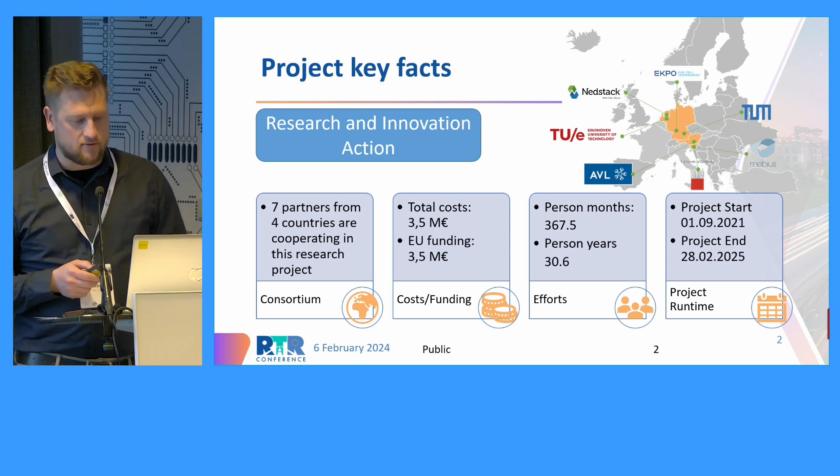About our core objectives: it's all about durability, it's all about costs, and also the implementation of the fuel cell technology in the heavy-duty sector. And therefore, some specific tasks need to be triggered.

We have to figure out how we can accelerate it, how we can perform accelerated stress tests to do a lifetime verification. We do specific improvements on the core components of the fuel cell, the so-called catalyst layer.

In parallel, we also try to improve degradation models, which is a key component, I would say. And resulting out of these points, we will try to optimize and validate the operating conditions of the fuel cell, and in the end, do a full fuel cell lifetime indication.

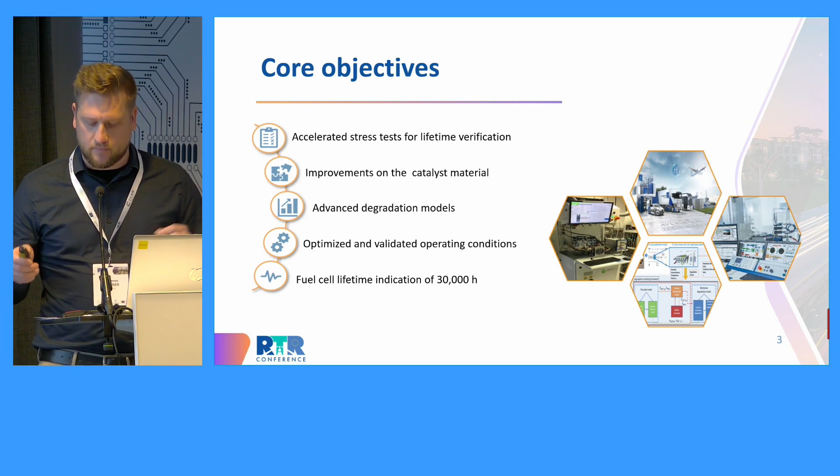So this is basically the story of our project. And now I really want to focus on the results that we have gained so far, because this is the focus of this conference, as I've heard.

It's about also the understanding of how can we endure and how can we make the fuel cell more durable. This is strongly related to the understanding of how a fuel cell ages, and at the end, we investigated strongly the effects of this degradation.

Because of that, we were lucky to have fleet data in our consortium that we could apply on specific accelerated stress tests, which were then created by the Technical University of Munich.

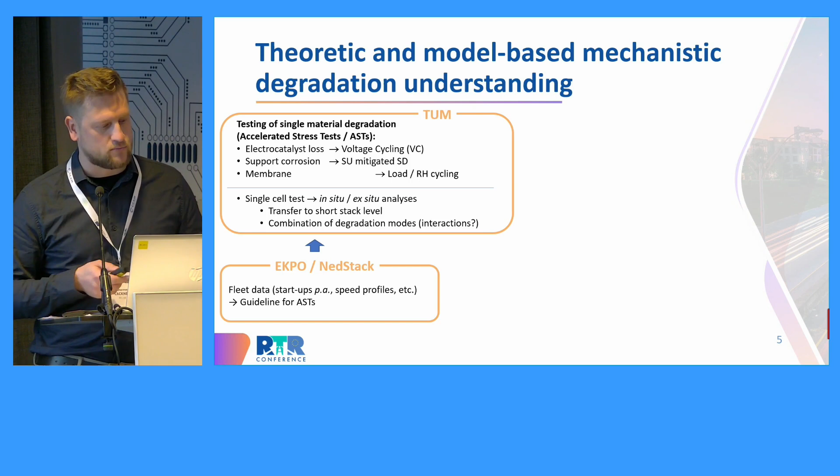We figured out that 3 specific accelerated stress tests are the most severe in aging the fuel cell. We dedicated these to the so-called voltage cycling, the startup and mitigated shutdown, and the load and humidity cycling on the fuel cell.

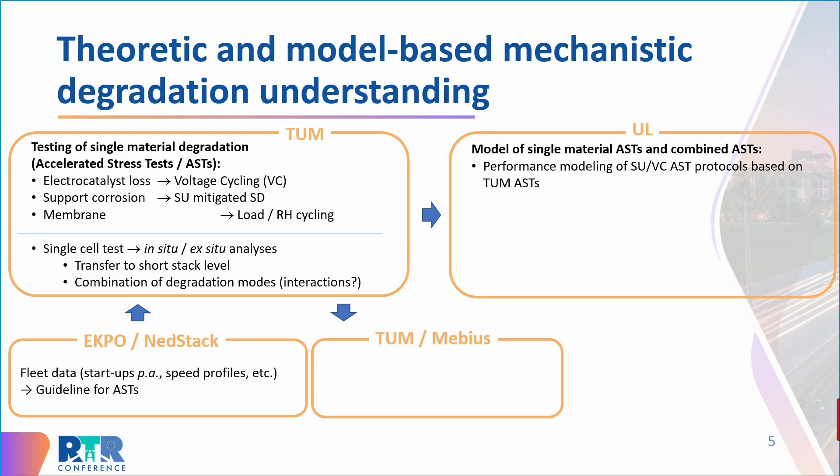With these test protocols performed by TU Munich, we then fed our performance models, which were then improved. In parallel, this was good input for the creation of our catalyst development.

With a feedback loop from our catalyst manufacturer, the extension of the model was also done in terms of degradation of bimetallic catalysts.

In our project, we are aiming to have a specific bimetallic alloy, a platinum copper alloy, which hopefully allows us to gain or create a cheaper catalyst material with high durability.

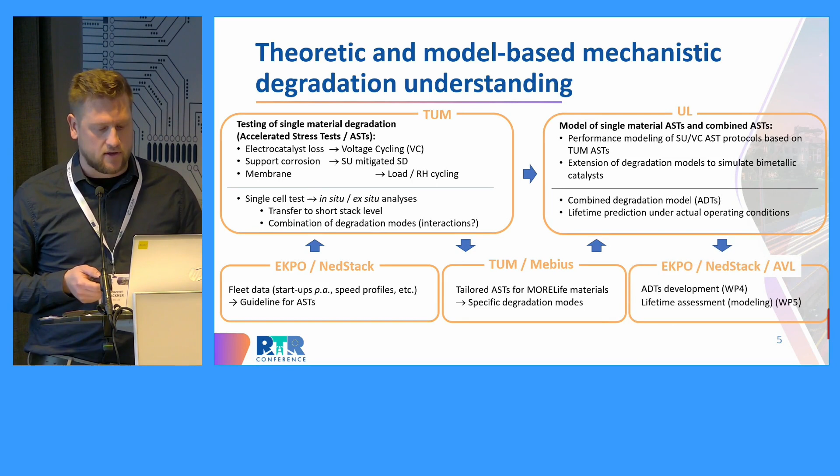So again, we have created these models and adapted them. At the end, but we are not that far yet, we want to perform durability tests and do a lifetime assessment on these models and also of the material.

So just an example of how these accelerated stress tests are being performed. It's not so easy to translate a specific speed or load profile into a specific stack load cycle. For that, we approached it by taking the existing VECTO tool using the speed profile of this tool.

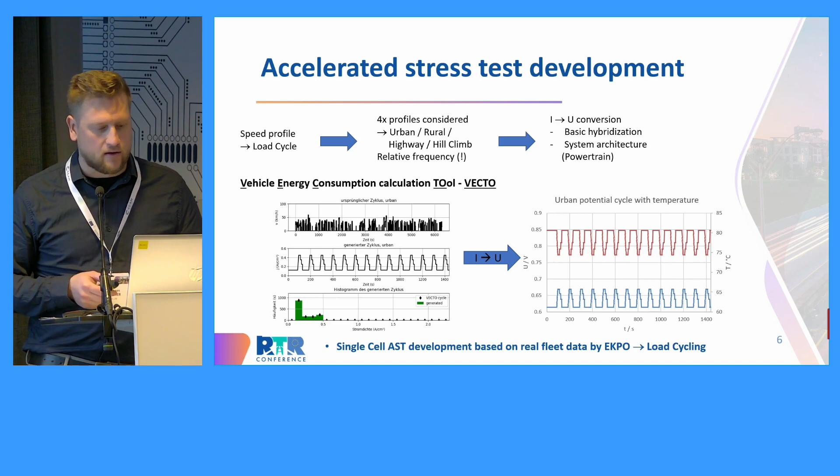Then we considered 4 specific profiles: urban, rural, highway, and a climb profile, and translated them, because we have a system that is current controlled, and we try to convert this into voltage control into the fuel cell.

And this is what we then created: we defined an AST matrix with an upper potential level of 0.85 volts and roughly 200 K cycles. So this is just an example of one of the accelerated stress tests we created, one of the 3.

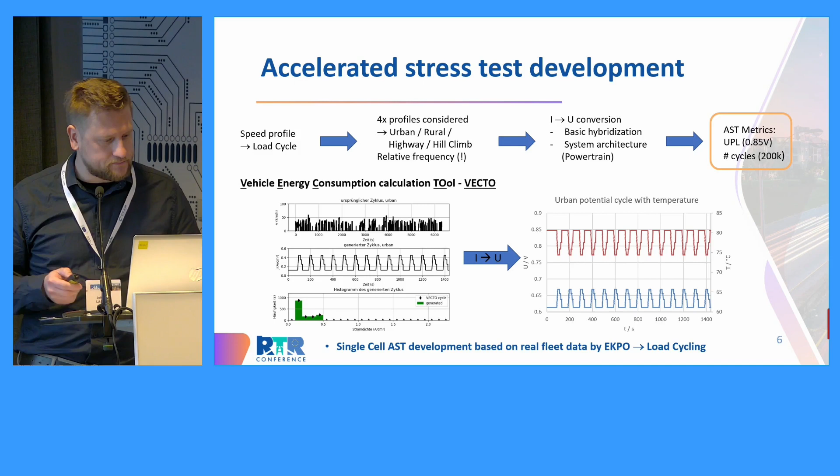Also mentioning then in parallel the model framework which has been performed. The idea of these models, or the need of them, is a deep understanding of the degradation, also having an extension of these models to our needs of degradation of a bimetallic catalyst.

So this was not existing yet. We do have some experience, or some models, for pure platinum catalysts, but in terms of bimetallic, we didn't have it anyway.

So the idea is really we had to apply, or adapt these models to specific dissolution processes which happen in these catalysts. I don't want to go into depth with that because it's really deep electrochemistry.

But at the end, the most significant issue we have with this bimetallic catalyst is that the copper is dissoluting over time and is somehow poisoning the fuel cell. This is what we want to investigate, and this is what we want to mitigate at the end.

And therefore we created these models which show the process of these dissolutions, and these models could have been parameterized and are now working accordingly.

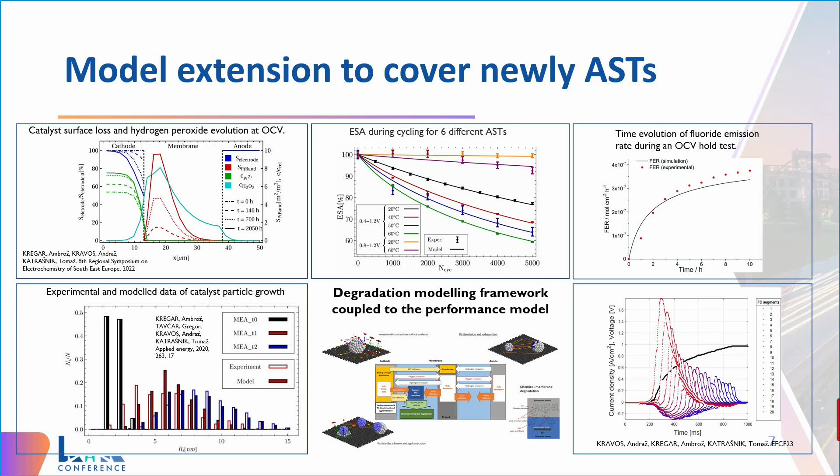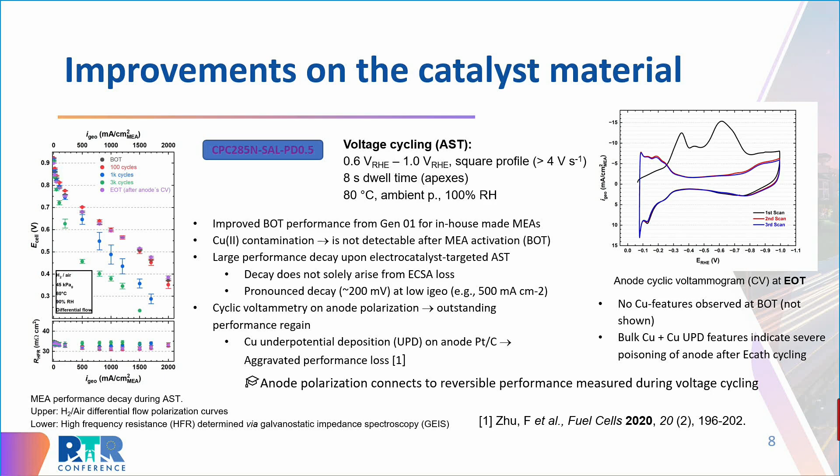We also have some ongoing collaborations with other research projects.

More specifically, MORELife is in discussion with the RWTH project, which is also a road transport heavy-duty application project. We try to provide some of the test protocols we created to the RWTH project, and once they perform these tests, hopefully we can get results in time, since MORELife is coming to an end, which will provide results we can use for adapting our models, for example.

This is a consortium of fuel cell and battery-related projects, where we search for synergies we can find within the projects, and we also try to have common dissemination activities. For example, we will have a joint booth at the TRA in Dublin.

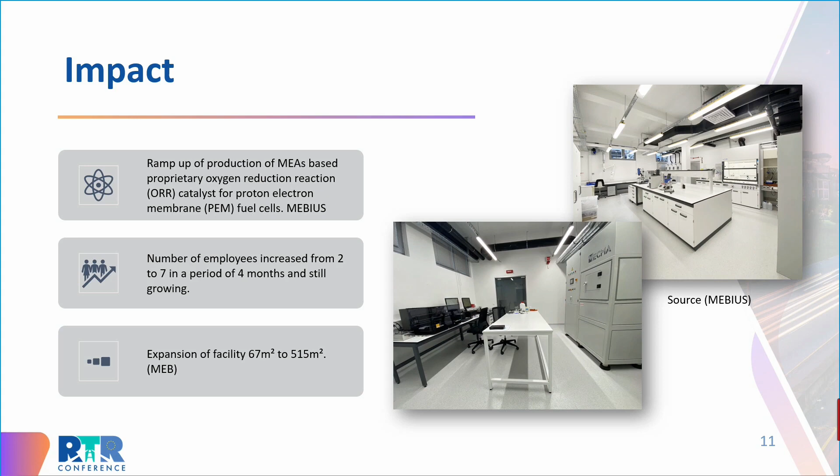So this is the midterm or actual impact, and now we are aiming at the impacts for 2023. We really want, as I said in the beginning, to bring fuel cell technology into the market, and this can only be done with severe cost reductions and a severe increase in the durability of the technology. For sure, we also have to do the industrialization of the product.

As I said, the targeted impact is to strengthen the European fuel cell industry, and we are also trying to increase collaboration between academia and industry. These are our settled goals, our impacts for 2023.

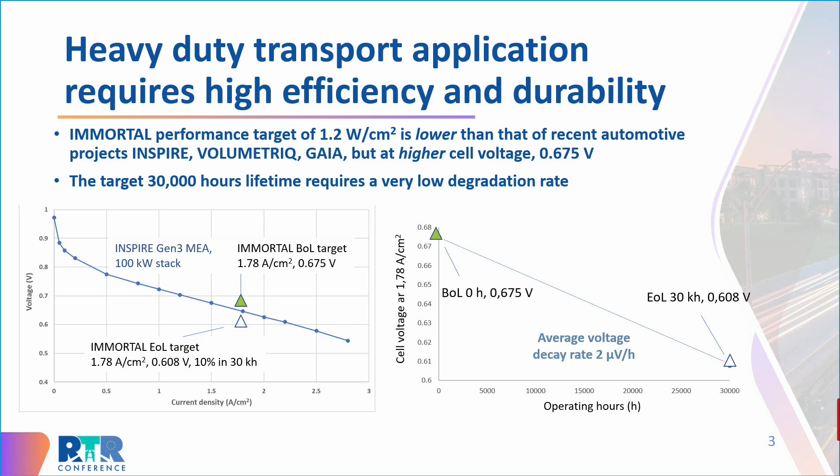So we're talking about heavy-duty transport application. Obviously the key requirements are high efficiency and durability, and so I've expressed those here. The target in terms of performance in the call for proposals was to reach 1.2 watts per square centimetre at 0.675 volts. The 1.2 watts per square centimetre is not in itself a massive issue - it's lower than we had worked on previously, or the targets in previous automotive light-duty vehicle projects, such as INSPIRE, VOLUMETRIQ or GAIA, where the performance target in terms of power density was 1.5 or even 1.8 watts per square centimetre. But the point is that it's at a higher voltage because we're looking for higher efficiency.

So this is one of the polarization curves that we obtained in the framework of the Inspire project. You can see that the IMMORTAL beginning-of-life target is just above that polarization curve there, at the current density of 1.78 amps per square centimetre. So that is to say that it was beyond the state of the art at the beginning of the project.

In terms of lifetime, the target in the call for proposals was actually 30,000 hours. That was actually beyond the SRIA target, which was developed subsequently, which was 20,000 hours for 2024. If we look at that beginning-of-life target on the right-hand side, and if we say that 10% degradation represents the lifetime, take 10% off of that voltage, then our end-of-life voltage is going to be 0.608 volts at that current density, which gives an average decay rate of only 2 microvolts per hour. So that's obviously a very low degradation rate.

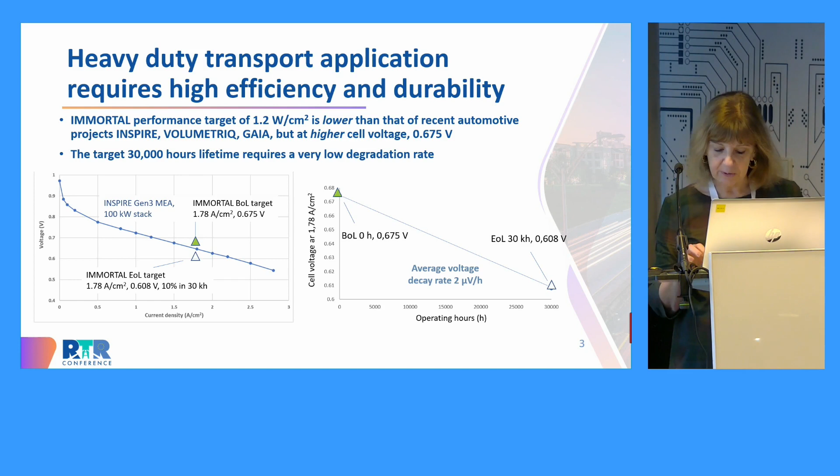Equally, there was no intention ever to actually test out to 30,000 hours of operation. So on the basis of what we could derive from the degradation profiles using AST and LPT protocols, then to develop algorithms for lifetime prediction to see to what extent we would actually achieve 30,000 hours of operation. And ultimately, of course, to achieve the targets in terms of performance and efficiency in particular, but also a calculation on the cost.

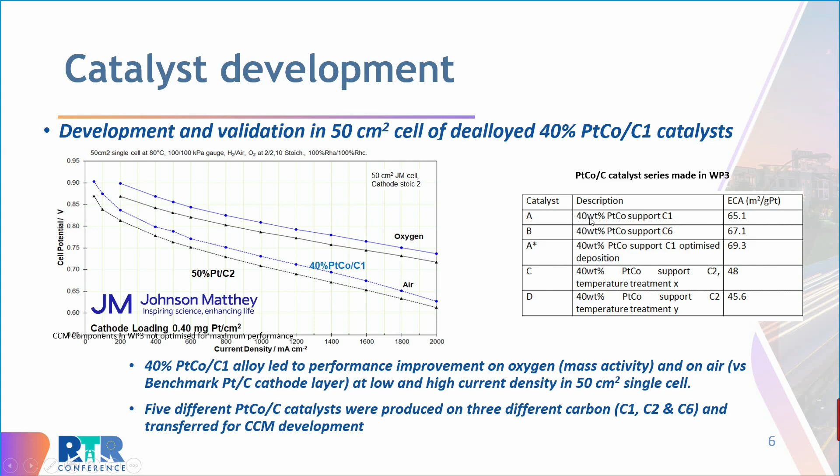So here's one slide on development at Johnson Matthey on de-alloyed platinum cobalt catalyst supported on carbons. I'm not going to go into any details of the preparation, but I just want to point out that Johnson Matthey developed a whole range of different carbons, of different catalysts, with the platinum cobalt actually supported on these different carbons, with some of the specifics given there.

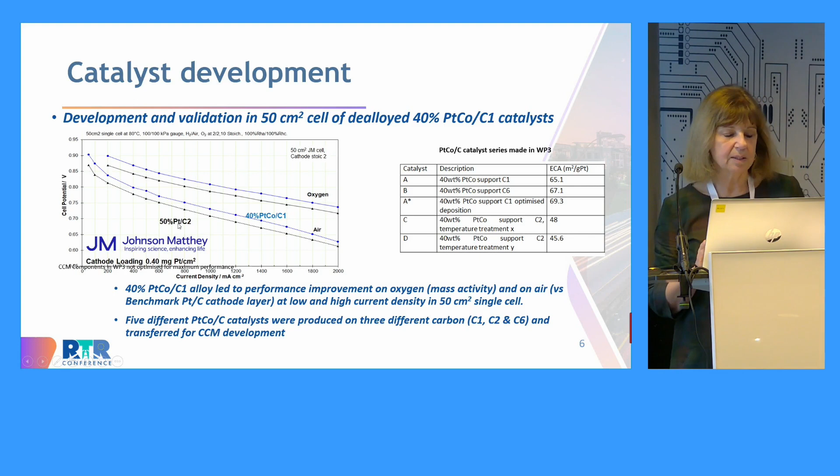In the testing carried out, this is on 50 square centimeter cells, the platinum cobalt, whether on air or oxygen, simply for calculation of the mass activity, but you can see they're more highly performing both at low and high current densities than the standard platinum on carbon material.

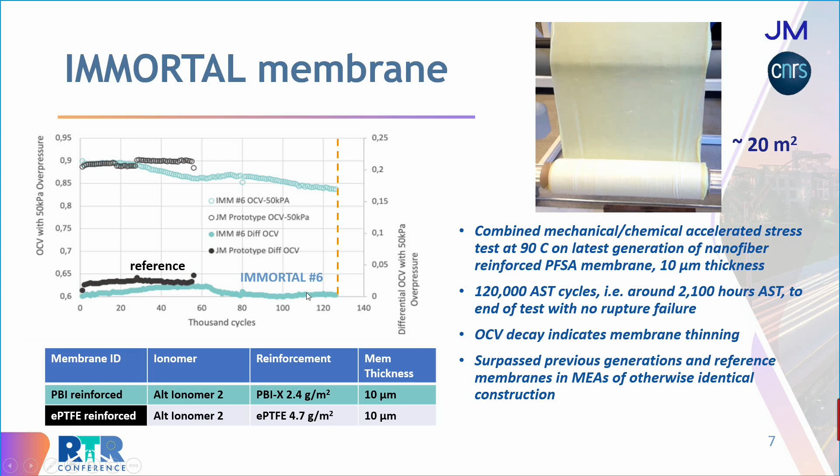It's a 10 micron membrane. What I'm showing here at the top is the OCV degradation, and at the bottom essentially the gas crossover, so it's the response to a small pressure differential at the anode.

So the accelerated stress test is the cell being held at 90 degrees C. There's a wet-dry cycling at open circuit voltage hold. So we're testing both for mechanical and chemical stability of that membrane as it's being held in the membrane electrode assembly. So this is the reference MEA with the absolutely same construction, but a different kind of reinforcement, standard PTFE reinforcement. This is the IMMORTAL membrane with a nanofiber type,

non-PFSA, non-fluorinated reinforcement. And in fact, we stopped the test here, or Johnson Matthey stopped the test here at 120,000 of these AST cycles, which actually corresponds to, in real life, more than 2,000 hours of actual AST testing with no rupture failure. We can see that there's a bit of a thinning here. You can see that through the drop in the OCV, but there's no catastrophic failure. The membrane is holding out.

It's also interesting to see that for membranes of exactly the same thickness, we're also using less reinforcement material with the nanofiber reinforcement than in the case of the PTFE reinforcement.

So how does that all come together then in terms of the CCM and the performance in the fuel cell? So here we have results from the testing at Johnson Matthey and at Bosch. We have three essentially generations of CCM or membrane electrode assembly. This was our baseline, generation 1. This was generation 2, in terms of the power density at that 1.77 amps per square centimeter spot.

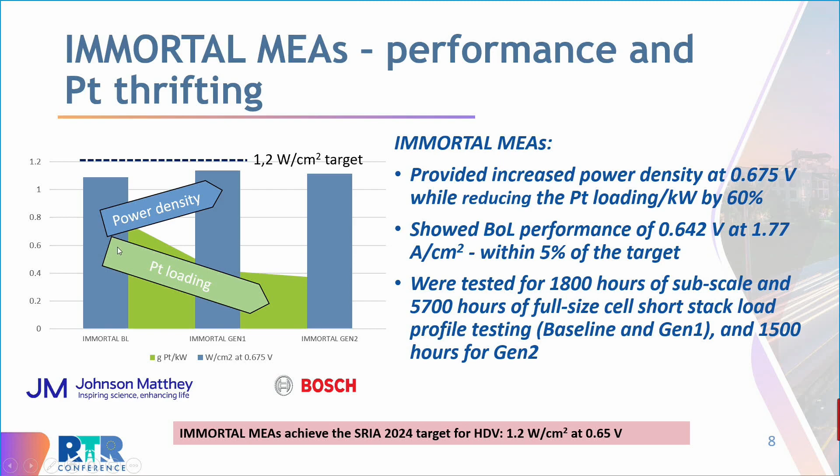So you can see that we've been gradually improving in terms of the performance. But notably as well, Johnson Matthey has been using far less platinum. There's been a lot of platinum thrifting, so improvement with regard to the amount of platinum and in fact generally noble metals incorporated into those CCMs, going down from 0.84 grams of platinum per kilowatt down to 0.36. So that's a significant improvement. That's what's written up there.

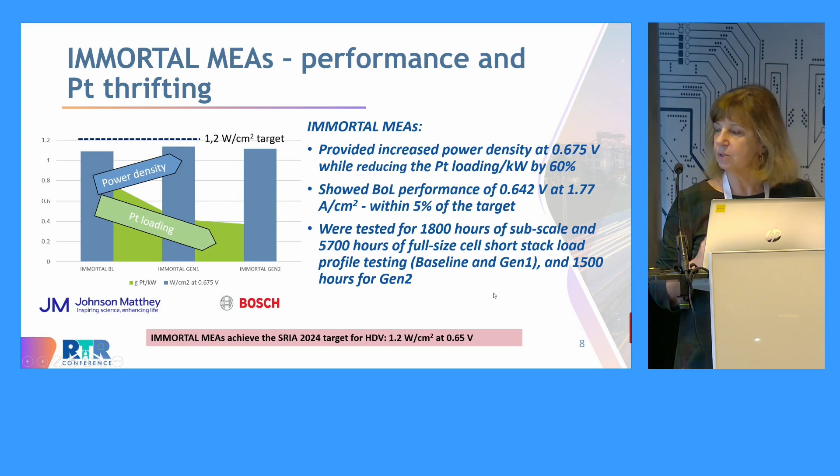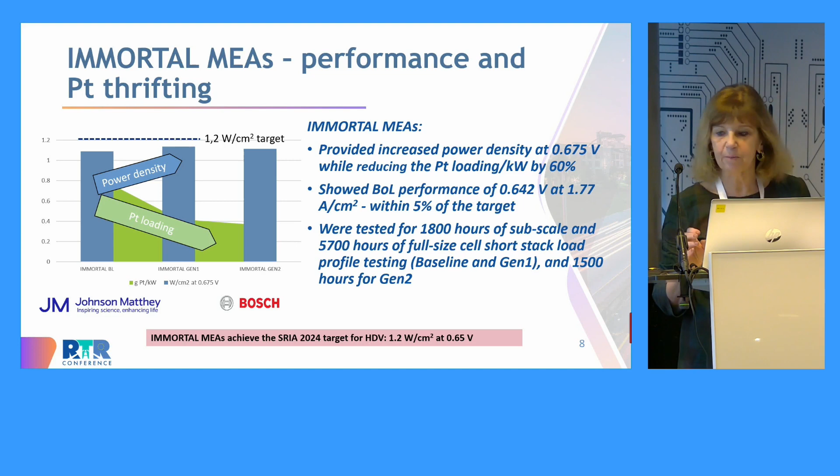These CCMs were tested in both short subscale, so small single cells, 50 square centimeters, but also full size short stacks for a total of, in fact, over 7,000 hours, once again, without any catastrophic failure. So let me show you that. But first, let me tell you all about the load profile test development.

Important work was done on actually what is the load profile that we use to test these CCMs that we've developed. So we're talking about truck activity, truck usage, obviously many different kinds of profiles that could be used for that. Our original intention was actually to use real-life data from fuel cell trucks.

That actually wasn't possible during the course of the project. But it was possible at FPT to have real-life mission profiles from different kinds of trucks.

That work was to simulate different drive cycles. In fact, more than 450 drive cycles were actually simulated. And then the extraction of the stack load profiles and the selection of the load profiles for testing, a lot of work between FPT and Bosch.

Those load profiles were then processed to enable their usage in terms of a modal load profile test that we could use for testing our stack. In parallel, there's the work done in collaboration between Bosch and IMTEK on accelerated stress testing on single cells, load profile testing on single cells, on short stacks as well for AST and LPT. So that gives us the acceleration factor between the AST and the LPT, but also the scaling between what happens in a single cell and what happens in a stack.

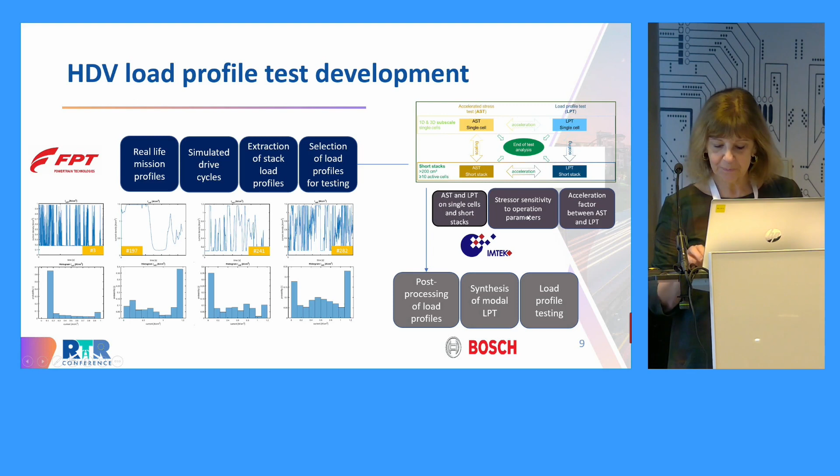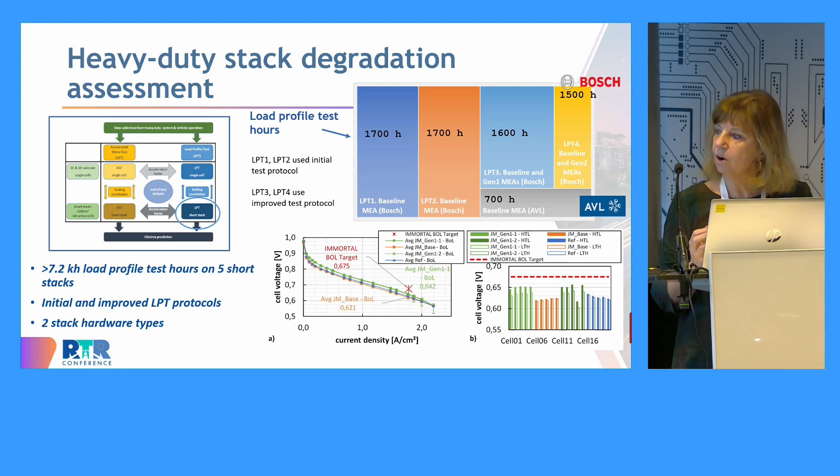With application of all of that, and I've already told you that in total there were more than 7,000 hours of load profile testing carried out on different generations of short stacks. We used an initial load profile test on our baseline MEAs and also on our Gen 1 MEAs. We then used that improved load profile test to test subsequent generations of MEAs. The message here is that in total, more than 7,000 hours of testing, 2 different sets of stack hardware - Bosch stack hardware, but also AVL stack hardware - and these initial and improved LPT protocols.

This shows the improvements during the course of the lifetime at that 1.77 amps per square centimeter point, moving up from the baseline up to generation 1, which is the green line there, and the ultimate target point, which is that one there.

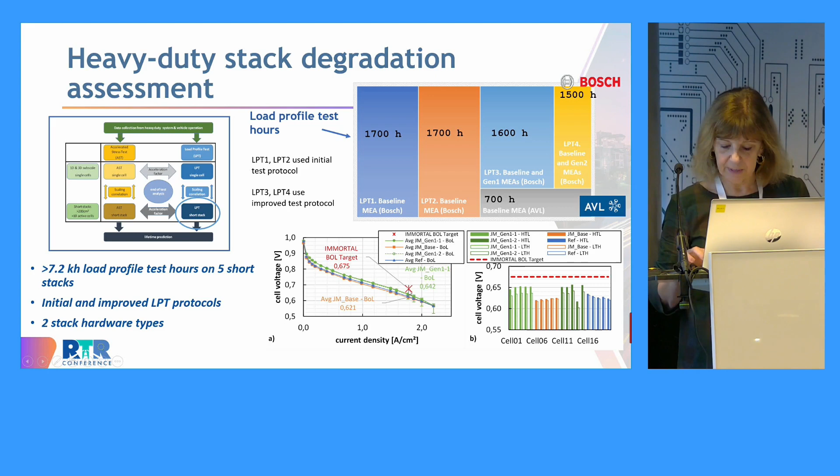So all of this AST and LPT testing generates a lot of data. What we discovered was that the degradation is essentially due to platinum dissolution, loss of the electrochemical surface area of the catalyst. That was determined experimentally.

That was also modeled. Using this information and following the development of lifetime prediction algorithms, the work done at Bosch was able to model the baseline voltage loss, having used all of the information on the ECSA loss determined during the AST experiments. I mentioned earlier that our criterion is to maintain 90% of the voltage at 1.77 amps per square centimeter, and extending that lifetime prediction out to 30,000 hours does show that in principle that would be obtained.

That's a very interesting result obtained with the baseline MEA - that they would actually achieve the full 30,000 hours were we to test out for that period of time.

So this summarizes what we've done. I've talked about the new membrane architecture with this novel reinforcement, thin membranes, 10 micron membranes that allow very high durability, no rupture failure, high mass activity alloy catalysts developed on novel carbons that certainly show an increase in the beginning of life performance on the MEAs.

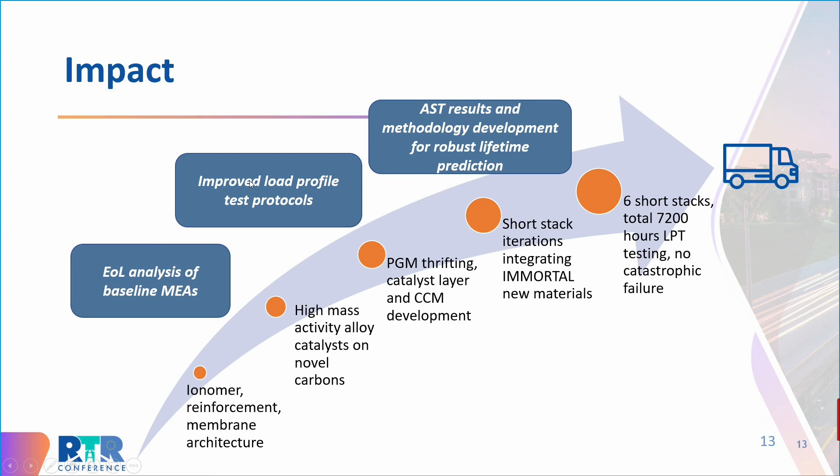And then obviously extremely important was all of the end-of-life testing on the baseline MEAs, to show what was the problem with regard to degradation, to feed that into the algorithms, but also to improve materials. Important work done on developing these load profile test protocols, because we need to know what are the relevant conditions for testing our single cells and our stacks, and then bringing all of these results together for the lifetime prediction.

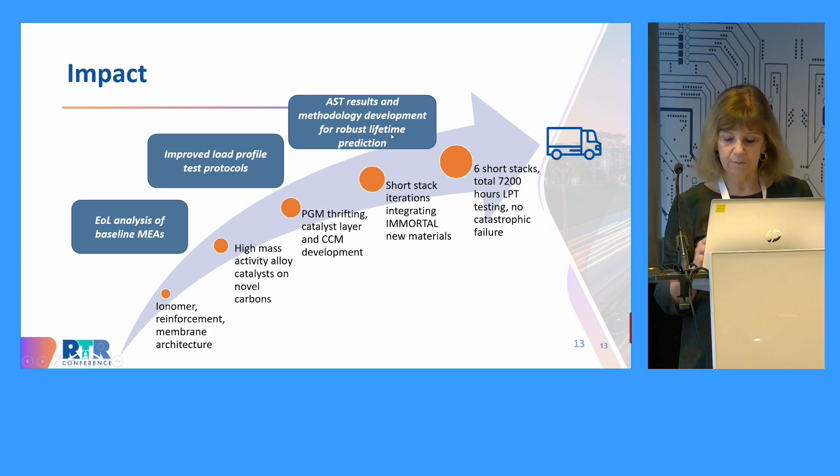What we showed is that with our baseline MEA, in principle we can reach the lifetime target of 30,000 hours.

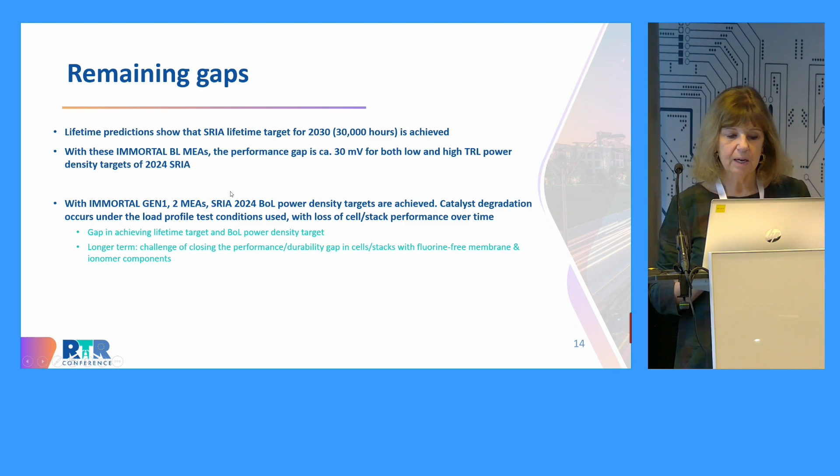Those that are not the most highly performing fall short by about 30 millivolts at the 1.78 watts per square centimeter point. They fall short a little bit, but they would achieve the lifetime.

On the other hand, we can achieve the power density targets with alloy catalysts, but then the durability is not achieved. So there's a gap in actually achieving both the beginning of life power density and the durability at the same time. But I think having, in principle, achieved the lifetime with an immortal MEA is a very significant result. And longer term there's clearly going to be a challenge to close the durability and performance gap if we're moving on to fluorine-free MEAs.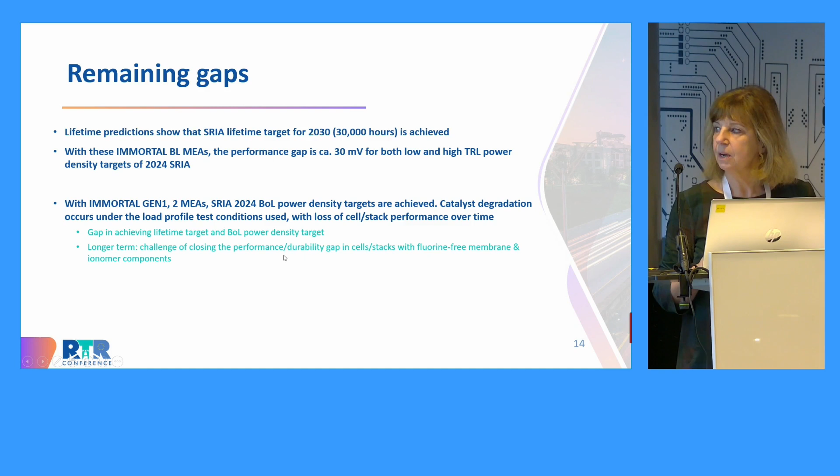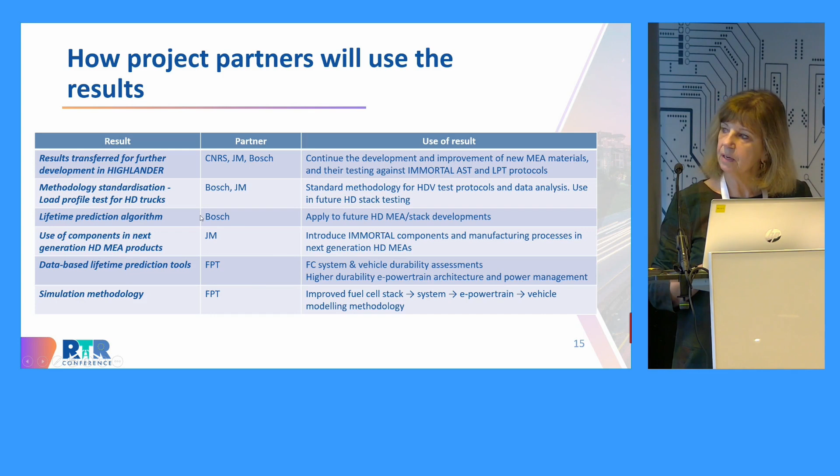So the project partners will use the results in various ways. CNRS, JM and Bosch are continuing to work together on materials development in the framework of the Highlander project. JM is going to move forward with the use of these components in their new MEA products. There's been a lot of methodology development and simulation methodology development, so methodology standardization for LPT development at Bosch, and simulation methodology and lifetime prediction tools at FPT.

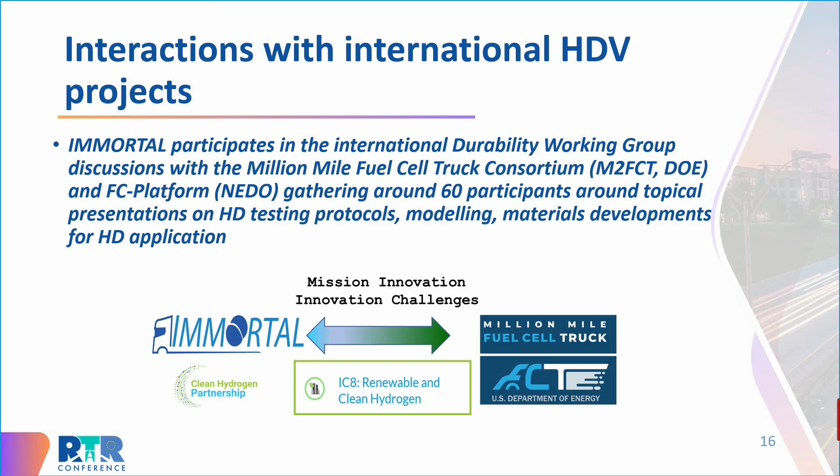So lots of application areas, both for the research partners and for the industrial partners. Finally, just to mention that we responded at the beginning to an invitation from Mission Innovation to interact with a project in the United States, a million-mile fuel cell truck project. We have regular two-monthly meetings with that grouping, which generally gathers around 60 different participants from the US, Japan, and Europe, all working on fuel cell truck heavy-duty applications. And so, thank you.

Thank you very much, Deborah. Very interesting and encouraging results. So I would like now to move on with the third speaker.

We are changing a little bit the topic, the subject, and Federico Zenith, who is a senior researcher scientist at SINTEF. He has more than 20 years of experience in the field, and his night job is to be the coordinator of the joint undertaking projects, one of them being StasHH, and we're looking forward to hearing about it. Please, Federico. Thank you very much, Pietro, for the introduction.

Yes, we started a project MORELife and then IMMORTAL, and we discussed with my colleagues that maybe a project should have a name like coffin or something. But I'm going to be talking about boxes in a few slides. It's actually about standards. We are not really that low TRL in this project.

For the overall presentation, it's a pretty big consortium we have in this project. Budget is pretty respectable, over 14 million euros. At the center we have several research institutions: my own SINTEF in Norway, FEV in Germany, TNO in the Netherlands, CEA in France, and Waterstofnet, the Hydrogen Association of Benelux. Then we have OEMs representing buses, construction equipment, trucks, ships, inland ships, ocean-going ships, automotive powertrains, and trains. So we've got pretty much everything moving on the surface.

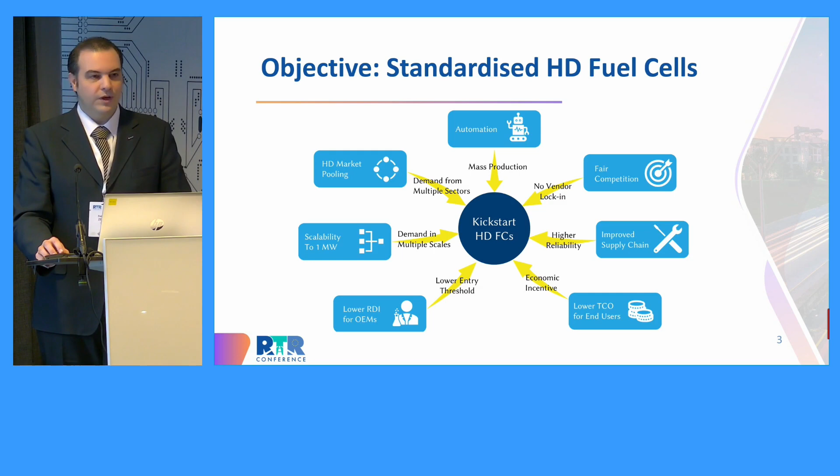So we have the first - size format standard is the most critical for OEMs. This is really important. If the next fuel cell does not fit the previous hole you had in the previous chassis, then you have to rebuild the chassis, and you start going down a rabbit hole of recertification, homologation, a process that can take years. So you want things to fit where they're supposed to. We ended up with these 3 base cuboid shapes: A, B, and C.

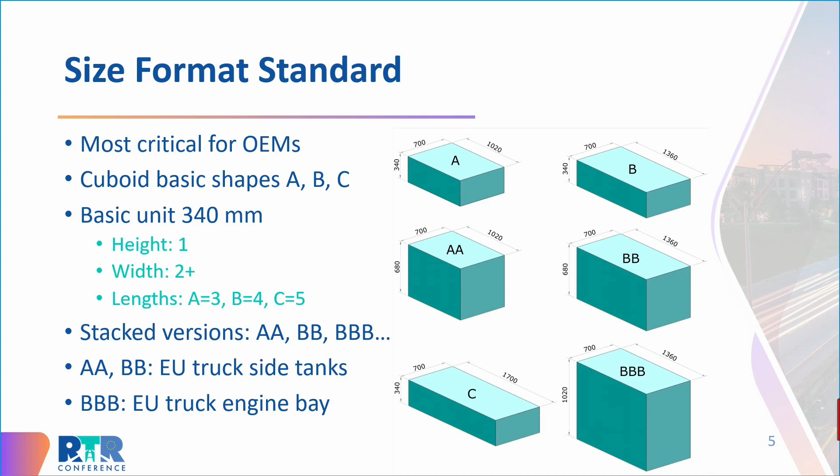We fought over every millimeter here. We start with a basic unit of 340 millimeters, which represents the height of this cuboid. Then the width is a little more than 2 - that's because somebody really wanted the last 2 centimeters. So we thought about this much - that's how hard it was. So it's 700 millimeters wide. And then the lengths are 3, 4, and 5 times the basic unit, and that defines A, B, and C.

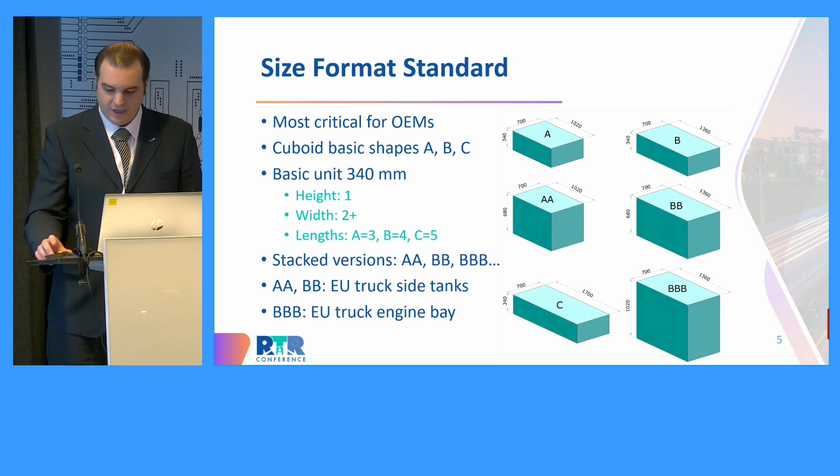Of course, there is no D, because that would simply be 2 A's in a row. Also, there's a standard by which if you double the letter, it means you're stacking upwards. So there's double A, double B, triple B, which are popular sizes for now. AB, AA, and BB are popular because they fit exactly in the place of fuel tanks in European trucks, and the triple B in the engine bay of European trucks. European trucks are very important because they're a very large market and very compact, especially compared to American trucks. That's why a lot of the standard comes from there.

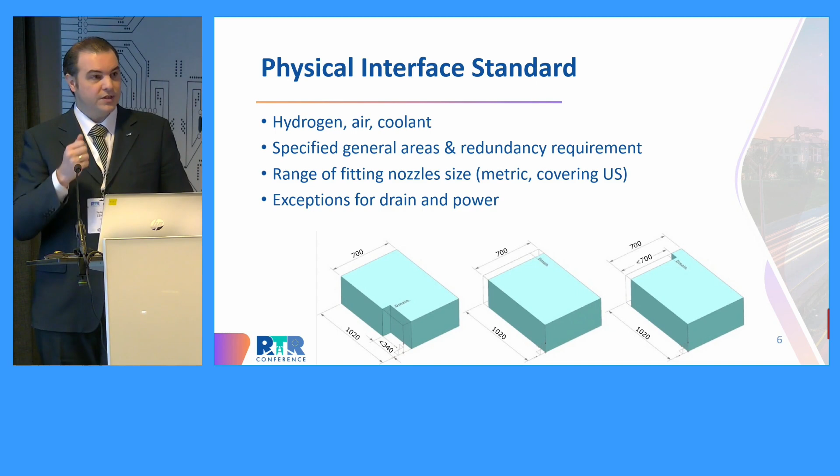Then, the physical interface. You also want to standardize where hydrogen is coming in, where air is coming in, where the coolant is coming in and out. In general, neither OEMs nor fuel cell manufacturers were interested in having a specific point with a specific connector - they were much more concerned with having a general area. It's pretty easy to move a pipe a few centimeters; what's difficult is if the pipe has to go all the way around the box, that would be a problem. There are some exceptions - the most important exception is power. It doesn't matter, you can bend a power cable around, but what's really important is where the hydrogen is coming in and out, and air and coolant.

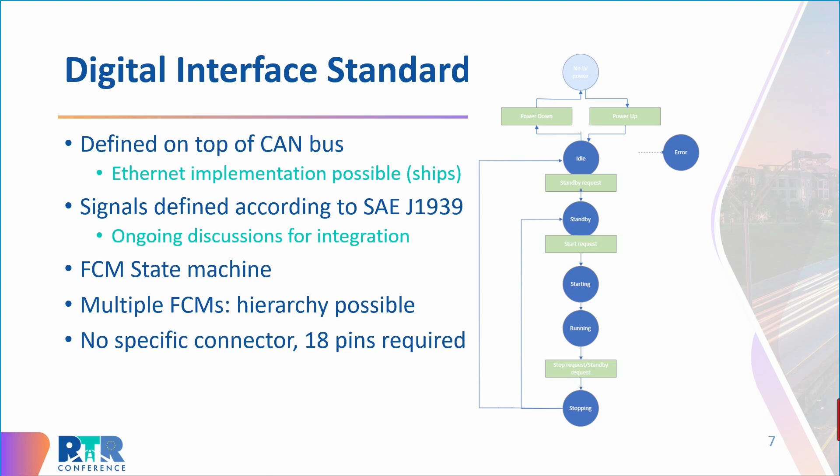Then, the third part of 3: digital interface. This is defined on top of CAN bus, but it's also implementable over Ethernet, and it was actually the maritime OEMs who were more interested in Ethernet - automotive were happy with CAN. Signals are defined according to the existing standard, SAE J1939.

We actually contacted SAE, and we're in dialogue with them to include our modifications to the standard - more than modifications, additions. The state machine is not too complicated, as represented there, and there's also a possibility of having a hierarchy of fuel cell modules. That's more important especially for maritime and trains, large applications. You can have all of them managed by a single controller, or you can have one of them acting as a leader with followers.

Again, we don't have a specific connector, just like for the physical interfaces. It needs to have 18 pins, but that's all the requirements. Pretty easy in a workshop to change whatever connector you have.

And then, well, of course, a lot of EU project defined standards. The problem was that after defining a standard, that was just a bunch of papers. So they required us this, and that's why we have a bigger budget. They required us to start building these prototypes to prove that we actually can do it. We're going to build 8.

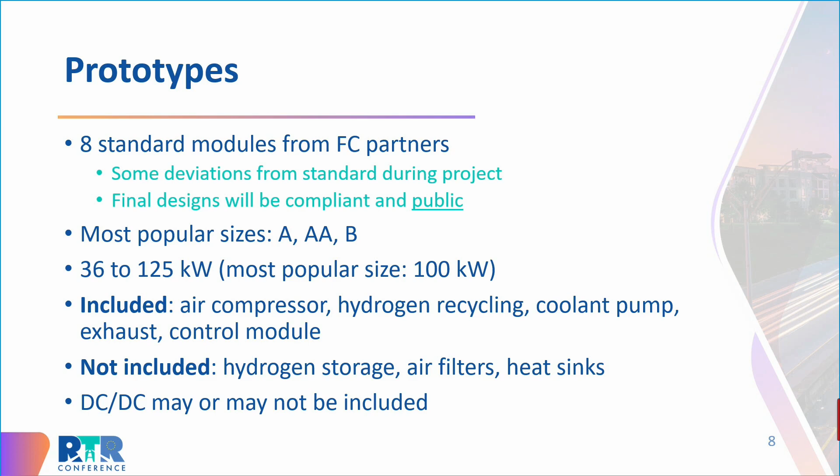There have been some deviations from the standard, mostly because the standard during the project has been a moving target, and so we have had some tolerance, but all fuel cell manufacturers are going to provide final designs, and they will be public, and you will be able in 1 year from now to go up to them and say, I want this one for my project.

Most popular sizes, we have seen AA and B. We haven't seen a BBB yet, and we haven't seen a C, even though the C size was supposed to be popular with buses to be installed on roofs, but apparently B is just as good.

The most popular power level is about 100 kilowatts, so in a higher range. Some are down to 36, some up to 125.

These modules all include the air compressor, hydrogen recycling, all the coolant pumps, control module and exhaust. They don't include, of course, the hydrogen storage, that's somewhere else, and the air filters and the heat sinks. And the DC-DC converter may or may not be inside.

We had a lot of discussion whether the DC-DC had to be included or not. We concluded that it's better that it's not fixed in the standard. There are some cases where it's useful to have it when you have only one unit. If you're maritime especially, you don't want to have the DC inside because you're going to have a separate unit for that.

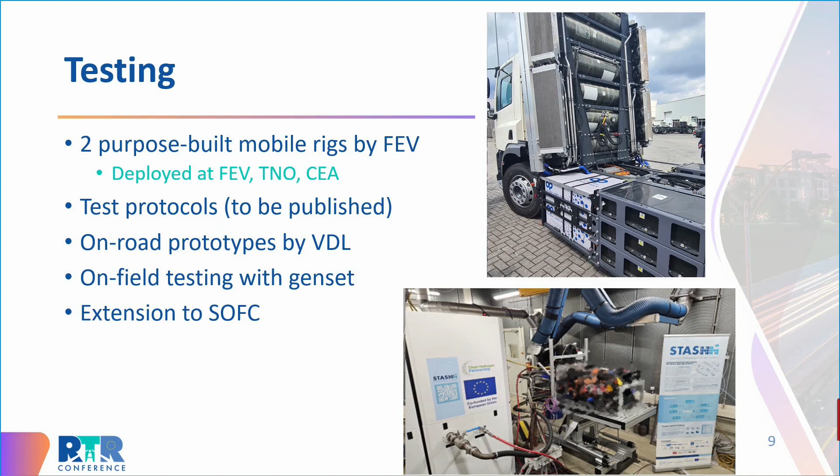Testing, yes, we have built this, and that truck runs in the Netherlands. This truck was also at the Hydrogen Week in Brussels last year. It's a truck built by VDL with 2 separate A-sized units, built by Plastic Omnium. You can see the logo.

And then we have 2 testing rigs in the lower picture. Fortunately for intellectual property reasons, you cannot see the actual unit there, but these have now been deployed at CEA. We are going to start, I think next week, a new round of testings.

Test protocols will be published. They're still waiting to clear that.

And there will also be some on-field tests with a genset that VDL has decided to build. And also VDL has decided to extend this to SOFCs. We assume PEM throughout, but actually the same technology, the standard, can be applied to SOFCs.

So, impacts. Well, of course, in 1 year from now, you'll be able to ask the fuel cell manufacturer to provide you these modules with this standard. We'll also submit the standard to various bodies. We're already in dialogue with SAE, and then we'll follow up with ISO. We'll see then. And we have a lot of FCM suppliers, of course.

We have a representative section of OEMs, and so we have a significant starting market, and hopefully this market will expand. This will make it easier for OEMs to start developing their hydrogen vehicles, and lower barriers for competition already in the short term.

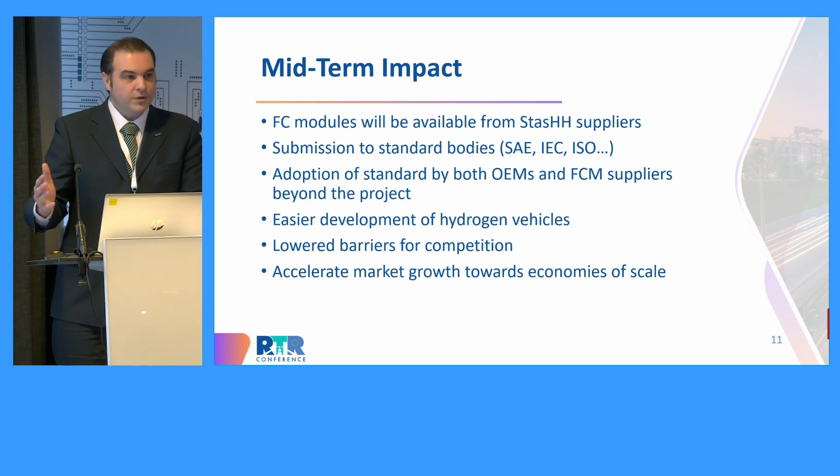And ideally, these will give impetus to economies of scale, which means that in the longer term impact, well, we all know heavy duty is more difficult to electrify than light duty with batteries. And hydrogen can solve this, but hydrogen also needs scale.

Batteries are piggybacking on the greatest infrastructure there ever was, the electric grid. Hydrogen does not have that. So we need scale in order to build this infrastructure.

StasHH will achieve the melting pot of all these markets, and this will show then that zero emission heavy duty is feasible. That's not a pipe dream. And this will hopefully encourage politicians to declare a year for zero emission heavy duty, just like they're all discussing zero emission cars cut off dates.

Norway is supposed to be next year, actually. We'll see how that's going to work out.

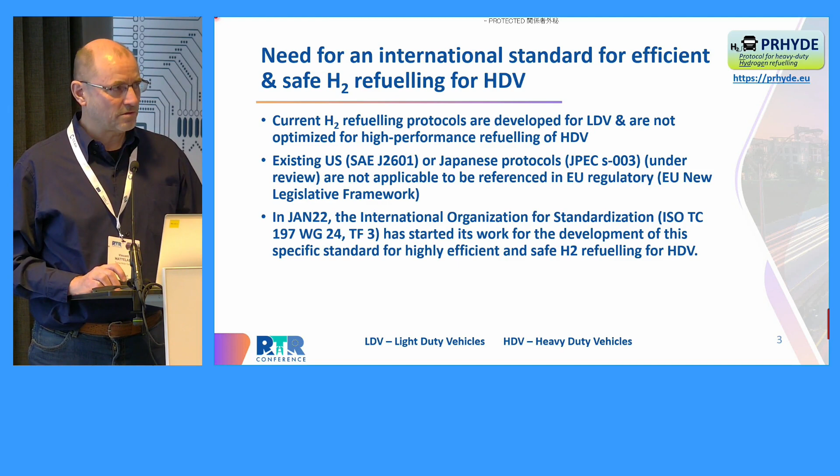We know there was already a protocol available for light-duty vehicles, and most of us are very happy with it. It's actually two protocols - a table-based version and an MC formula version for light-duty vehicles, used worldwide. However, it was a protocol from SAE, J2601, and it's not really an ISO international protocol or EN protocol, so it's difficult to use SAE within EU regulatory frameworks. We needed a more general protocol at ISO level, and also a protocol for higher flows - obviously fueling heavy-duty vehicles with the light-duty vehicle protocol would be way too slow.

So the overall objective was to support this standardization. The PRHYDE protocol, the result from the PRHYDE project which is already finished, is not a copy-paste protocol that you can immediately program into your dispenser and go ahead with it. It's more laying the foundation stones for developing protocols, because protocol development takes much longer and much more testing than just two years. This was done for heavy-duty vehicle high flows up to 300 grams per second, which is very high, for 350, 500, and 700 bar conditions.

So there were a lot of experts involved from Air Liquide and other companies who are very specialized in this and were able to test a lot of these fueling situations. So let's have a look at the results.

As I mentioned, the light-duty vehicle protocol already existed, but that was for 2 to 10 kilograms. There was an extra chapter in that protocol where you could go above 10 kilograms. It was called category D, but honestly this was suitable -- it says here 30 kilograms, I would rather say 20 to 25 kilograms within a decent time. You could go higher, in theory unlimited, but then the fueling time would take so long it would never be accepted by logistic partners.

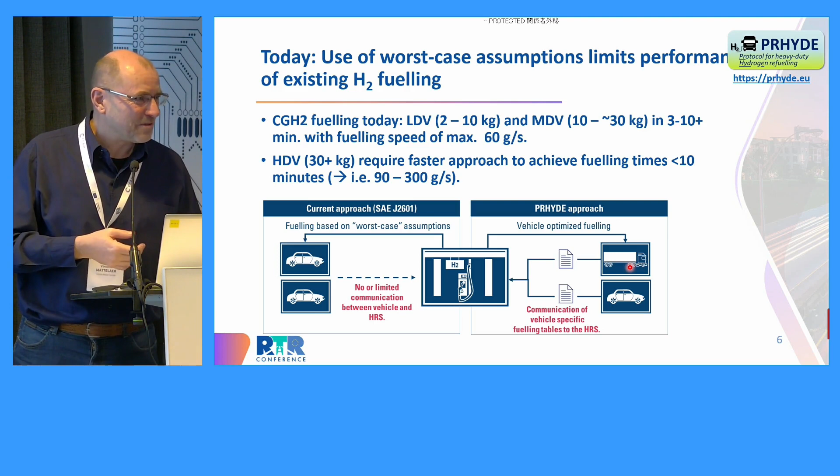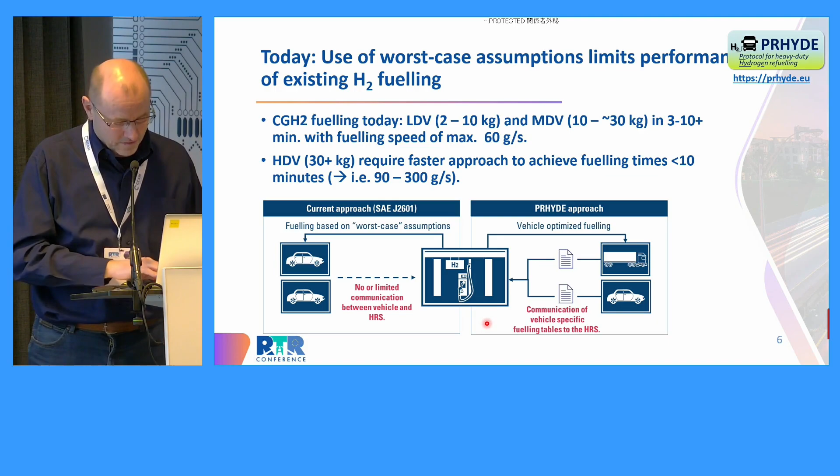So the PRHYDE approach is a bit different. In the PRHYDE approach, there will be a difference between one truck and another truck, for example, even though it might have exactly the same volume, same capacity in the tanks -- maybe truck A has a much lower pressure difference than truck B, and then truck A will be able to fuel faster, which was not possible with the current SAE protocol. So in this case, it's the trucks that send the information to the dispenser about how they are going to be fueled. I will explain later how this is done.

So the PRHYDE protocol concepts offer performance improvements, and we did several testing, and it succeeded. The big advantage is also that the OEMs can choose, they can become competitive, and they can say, okay, my truck will fuel much faster than my competitors.

National Laboratory in Colorado, NREL, has an H2FillS simulation software. We did simulations, checked the simulations with real-life measurements, and the simulations and also testing have proven that it is possible to do within 10 minutes. The most recent one that I've seen was about 89 kilograms in about 9 minutes. Now I have to admit, in that case there was no nozzle receptacle connection -- it was a direct connection, so that makes it a little bit different. But still, the results are quite good.

And it's based on the advanced MC formula, which was already existing for light-duty vehicles, but it's an advanced version.

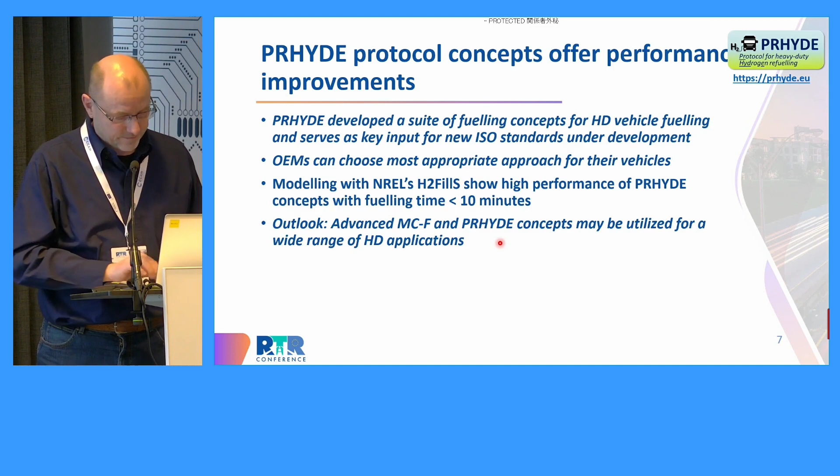So how does it work? First of all, the vehicle OEM needs to define a set of what we call T-final tables. Those are tables depending on the ambient temperature and the dispensing temperature. You check what, at these conditions, should be normally the fueling time for this specific model. A special simulation software needs to be developed in order to enter all the data, and then it can develop these T-final tables. You can have as many T-final tables as you want in your vehicle ECU, and they are stored in the vehicle itself.

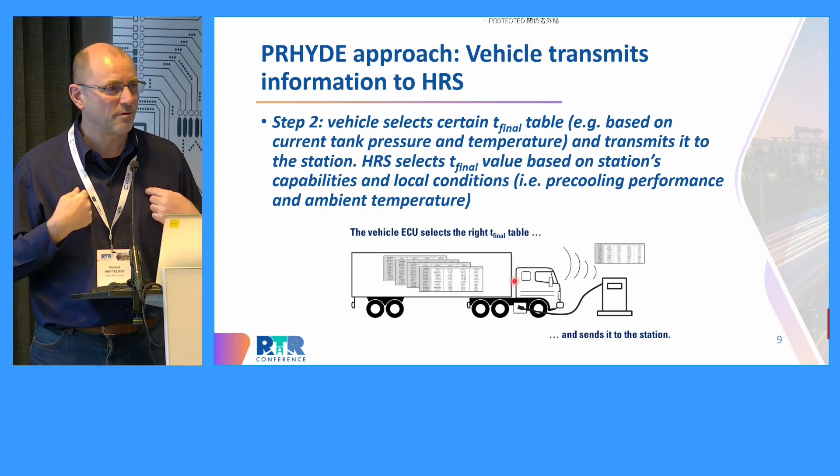When the vehicle arrives at the station, it will have a certain temperature, tank temperature, and a certain initial pressure, and it will choose the corresponding T-final table, and send that T-final table to the dispenser, saying, I want to be fueled in this way, this is the way I want to be fueled for my truck. This is very different from current protocols, where everything is already pre-programmed into the dispenser, and it will fuel any vehicle in the same method.

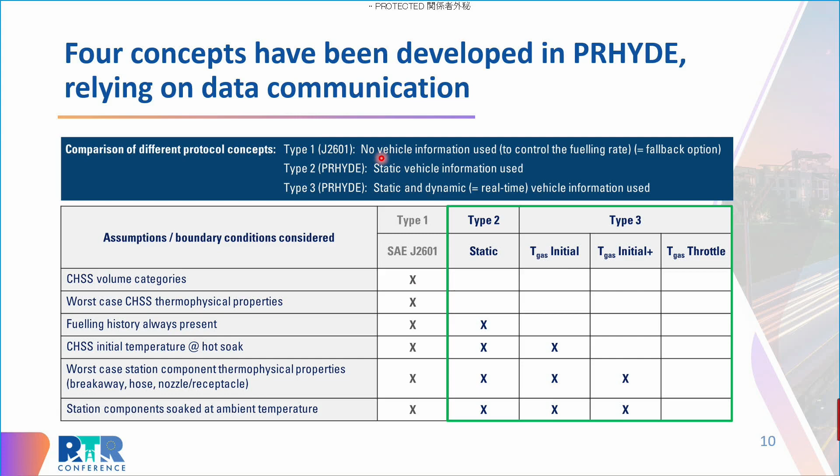So we differentiated different types of protocol. Type 1 protocol was the one which used no vehicle information, so you can go into non-communication mode even if you want to. Type 1 versions, even based on the PRHYDE protocol, already exist, because they are now integrated into the new standard SAE J2601-5, which is specifically for heavy-duty vehicles. So that's the first type.

The second type is what we call a static type, where a lot of information is sent to the dispenser, but it will not really use the dynamic approach of continuously checking the pressures and temperatures of the vehicle. But it will, for example, check if fueling history was present. So, for example, if a truck has fueled first at 350 bar because the price is cheaper, and then afterwards takes the next dispenser at 700 bar to top off with a little bit more expensive, that will be taken into consideration.

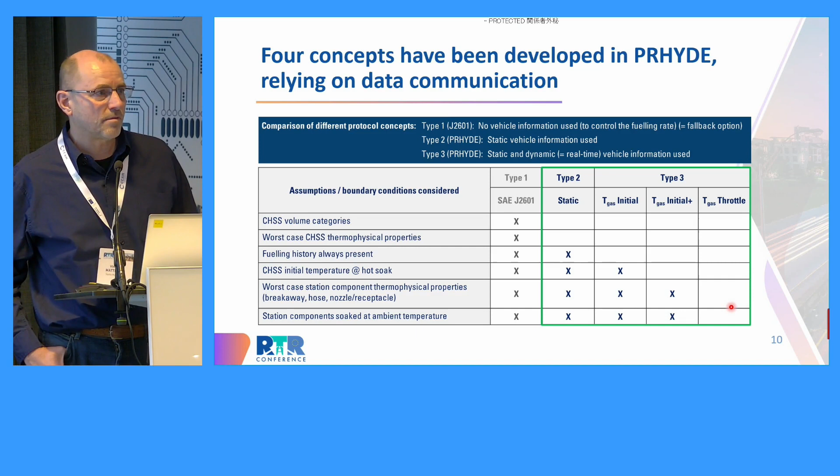And then we have the more advanced versions, type 3, which are called T-gas initial plus, and also T-gas throttle has been developed, where we take much more into account the initial gas temperatures and pressures of the vehicle. With T-gas throttle, this is really a fully dynamic protocol where the fueling continuously depends on the current pressure and temperatures inside the vehicle.

So what are the mid and long-term expected impacts? Well, it is already happening at this moment within ISO Technical Committee 197. Working Group 24 has been established, and there are 3 different standards in that one. ISO 19885-1 is a general standard concerning fueling protocols for heavy-duty vehicles, -2 is concerning the communication between the vehicle and the station, and -3 is about the protocol itself. And of course, those protocols will be used to program the stations.

And there is a subgroup 3B, which is called the PRHYDE protocol. It's based, of course, on the PRHYDE project, and it will go further, and it will be able to fuel with very high flows, up to 300 grams per second.

The hardware is still lacking. There is already hardware for 700 bar heavy-duty fueling based on a 90 grams per second nozzle and receptacle. Those already exist. But within ISO 17268-3, the discussions concerning the geometry of the high flow nozzle and receptacle still need to start. They will start one of these months. So that one will come a little bit later.

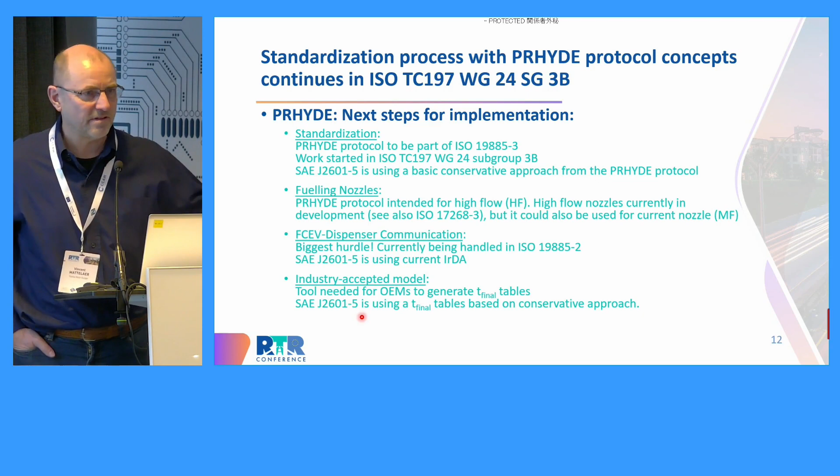So the landscape is what is contained. It will be about 350 bar, 120 grams per second, already existing. But honestly, for CEP Wenger, it's a table-based protocol, but it's very limited, only from 20 kilograms to 42.5 kilograms, meaning that if you go above or below that value, the Wenger table-based protocol is not applicable. But they can always use the advanced MC formula from the -5, because that one goes from 10 kilograms, or from 250 liter tanks to 7,500 liter tanks.

That's really a lot, 7,500 liters. So it's not only applicable for trucks, but it can also be used for trains or other applications that are using big tanks.

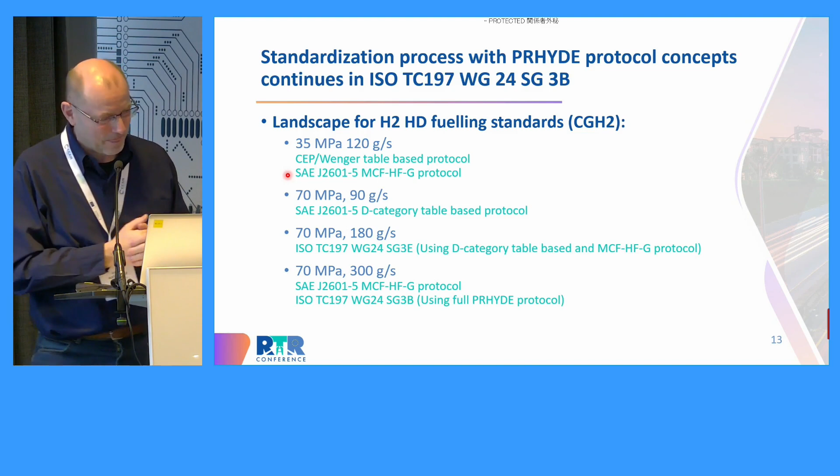Then we have here the 70 megapascal, 90 grams per second, which is already incorporated into the -5 as a table-based version, but it's also missing here as an advanced MC formula based on the PRHYDE protocol.

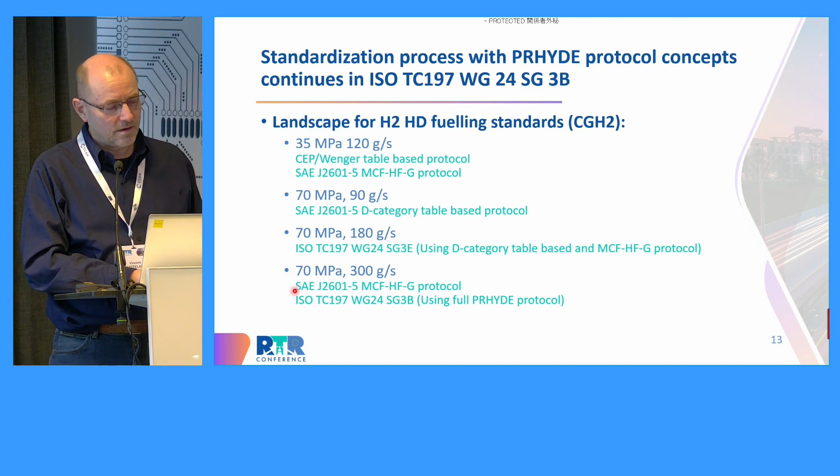And this can be doubled up to 180 grams per second, which is subgroup 3E, as I already explained. And then the fastest fueling will be 300 grams per second, but there you will need different hardware to make this possible.

So that was the quick overview of the PRHYDE project. You can always contact me on this email. Thank you.

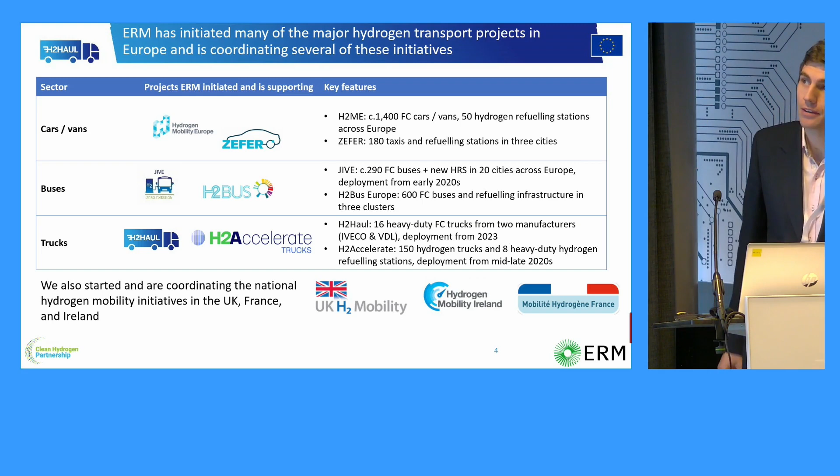So for cars and vans, there's H2 Mobility Europe and ZEFER, which will deploy by its end 1,400 cars and vans and 50 hydrogen refueling stations across Europe. ZEFER is wrapping up at the moment with 180 taxis and other vehicles, with the Metropolitan Police in London testing vehicles in intensive use cases.

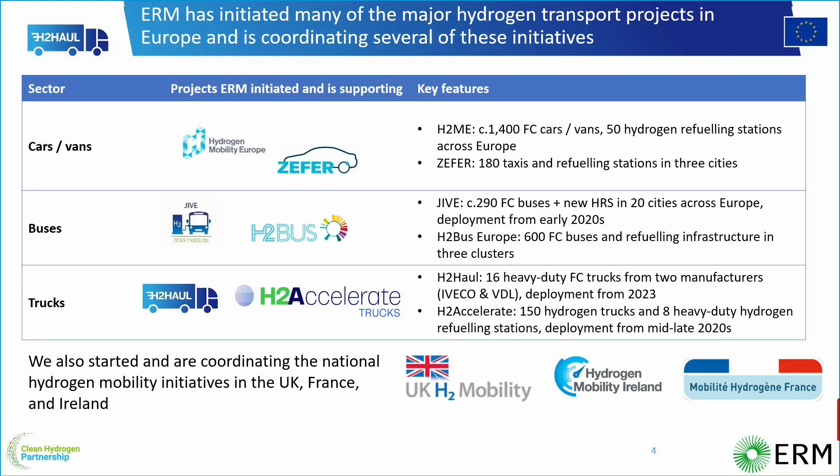And then on buses, the Jive project is deploying nearly 300 buses and HRS in 20 cities across Europe. Again, the latest in a long line of demonstration projects of buses that have now helped commercialize the technology and got those vehicles running reliably, efficiently, with costs now coming down very strongly in the next generation of vehicles.

And then H2 Bus Europe, still in its ramp up, aiming for up to 600 buses at much lower costs, to replicate the successes of the projects to date across different cities and with increasingly large volumes.

And then finally, to get to trucks, the subject for today: H2Haul is one of the first truck demonstration projects as opposed to R&D projects, and we'll come to that in a minute, deploying trucks from 2 manufacturers.

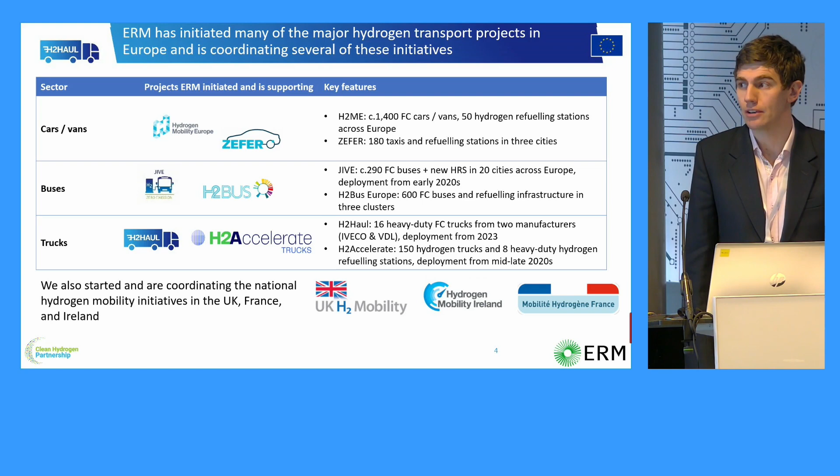And that has led directly to a successor project called H2Accelerate, with the participation of Iveco, Daimler and Volvo, which will deploy 150 hydrogen trucks and 8 more stations from the midpoint of the decade. I'd argue the H2Accelerate project is sort of the one before the full commercial rollout, which the truck manufacturers will need to do to meet their fleet CO2 targets in the EU regulation from 2030.

So, H2Haul then started 5 years ago. These projects always last long, and as Vincent mentioned, with COVID and then some other delays, they have a history of being extended and needing a little bit more time to meet their objectives.

So the overall objective is to deploy long haul, heavy duty, 26 to 44 ton fuel cell trucks that meet customers' requirements in a range of operating environments. This is not R&D and playing with things on a test track. This is vehicles in service with demanding clients.

Using their full driving range each day, pulling loads at maximum gross weight, using different refueling stations, and proving to the project partners and the wider logistics sector that fuel cell trucks are viable and present advantages relative to battery electric vehicles in certain use cases, primarily ones with high driving ranges, high weights, possibly difficult climatic conditions, where fuel cell will sit alongside batteries as another solution for zero emission decarbonised road freight.

These trucks didn't exist at the beginning of the project. So before you can get them onto the road, you have to design them, you have to integrate fuel cell systems, power electronics, tanks. You have to homologate them so they're legal for use in different European member states. And then you can deliver them to customers and get them going in real world use.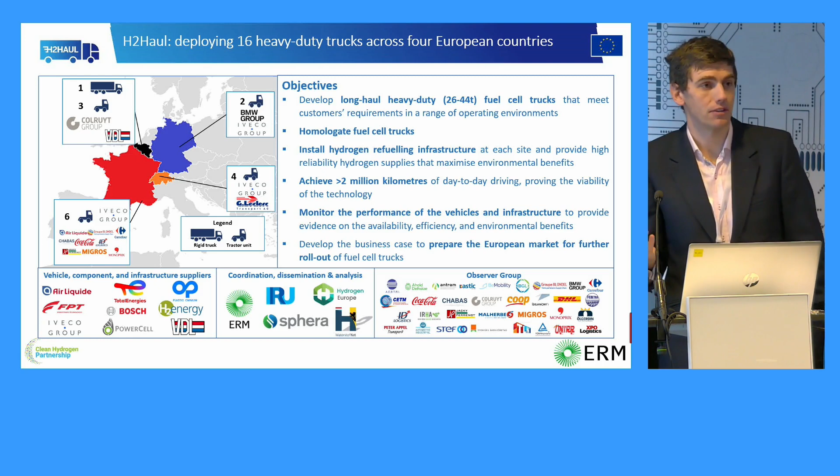To be ramped up in the future in a wider range of use cases and a larger group of partners beyond these early adopters. And then there's work on developing the business case, looking at the total cost of ownership, where the most interesting market segments are, and how do you commercialize this technology, starting from a very low base of these first 16 vehicles.

So the partners are those that you see here. We initiated the project and we're doing the coordination. There are 4 deployment clusters in Belgium, France, Germany and Switzerland, with a range of partners that you can see there. The truck manufacturers, there are 2 of them, VDL and Iveco.

And we also have the various fuel cell suppliers as formal partners in the project, and then various other partners providing either the HRS and the hydrogen refueling stations, or the truck operators and sometimes the end customers for the vehicles, to make sure that we maximise the availability of the learning and the data generated by the project.

So the broad flow of the project is what you can see here. As I mentioned, there's quite a lot of work to do initially to specify the trucks. What technical characteristics will they need to meet the operational requirements, such as the range, the refueling time, and so on.

Of course, comply with length and weight regulations in Europe, and the packaging of the fuel cell systems on the vehicle. When the project started, the truck manufacturers had not yet selected their fuel cell provider, so already that was a step to select those providers and then work on the integration of the systems into the vehicle.

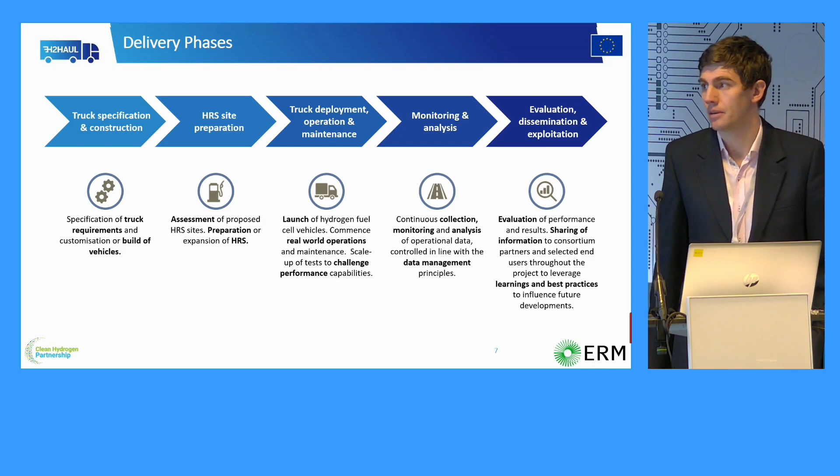And then HRS site preparation, making sure the infrastructure is ready for these trucks. Then truck deployment, operation and maintenance, which is about to begin. And then, as I mentioned, the monitoring analysis and the dissemination activities that will make sure that we maximise the European value for money and the impact of the project on helping to accelerate the next phase of deployments.

So the progress to date, truck specifications and designs have been completed, the prototypes have been built, there has been internal testing of these vehicles to make sure that they're safe and suitable to be used on public roads. The Iveco manufacturing site has been opened during the time frame of the project, and we're now nearly at the end of the truck construction for the 16 vehicles that will be put into service. There's been some hold-ups on homologation, as there often is.

Vehicles that were expected in end of 2023 will probably go into service in the first half of 2024, and then they'll need to operate for probably a year or 18 months to meet that 2 million kilometres target for operation, which is one of the technical criteria of our funding.

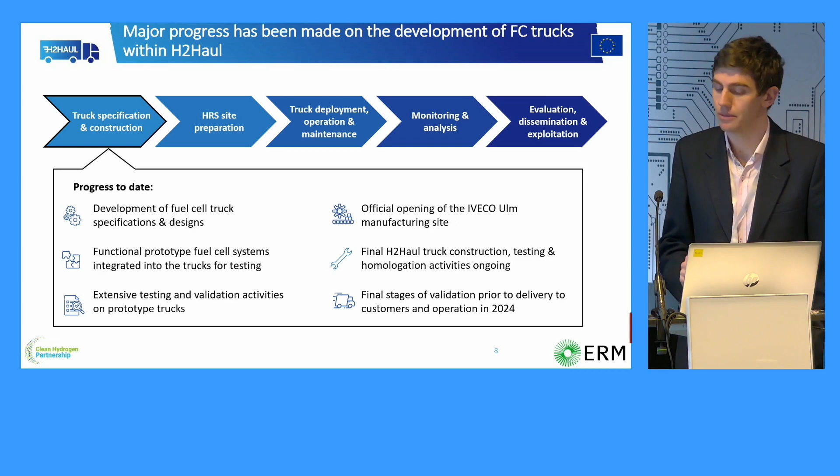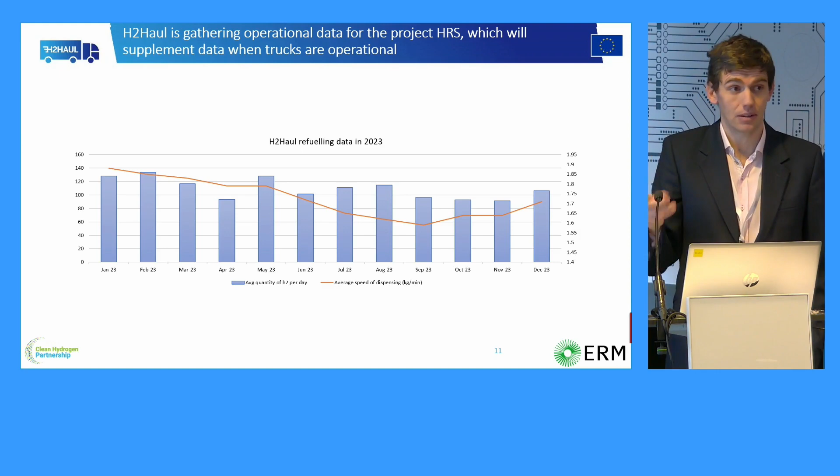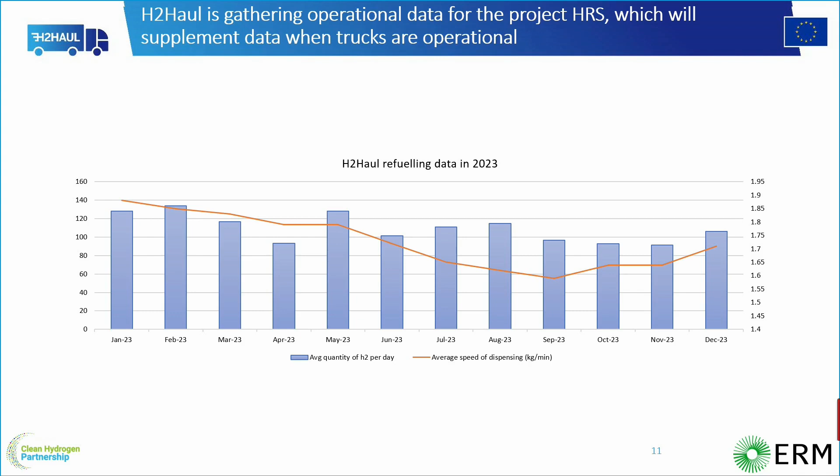These numbers are significantly lower than what you've just seen in Vincent's presentation. I think it underlines the need for the PRHYDE project and the next wave of refuelling protocols, because if you're at 1.8 kilograms a minute here, even at the maximum, then that's 18 kilograms in 10 minutes. If you've got large tanks of 50 kilos for some of these long-haul trucks, you're nearly at 30 minutes, and that's not going to be acceptable to end users, and is not really a distinguishing feature from a megawatt scale charger for battery electric trucks.

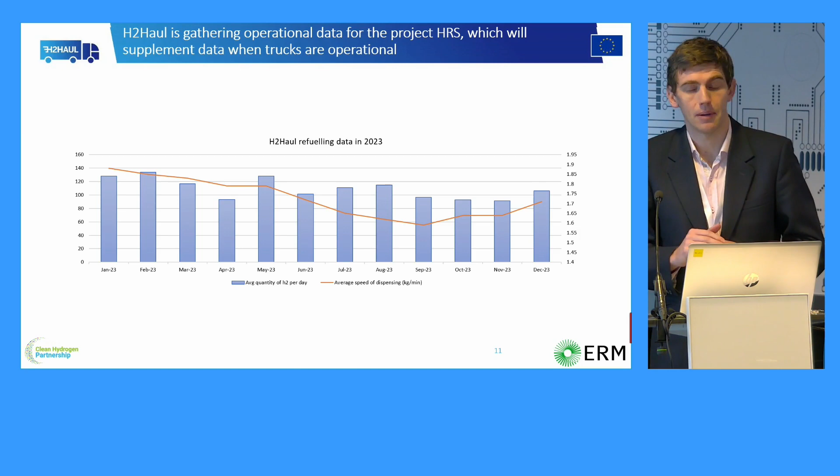So we need the next wave of protocols, as Vincent has described, to reinstate those advantages of very fast refuelling, even with the large tanks that you see here.

So the trucks are going into service, as I mentioned, but there are also already quite a few learnings from the work done to date. There's been a lot of work on selection of different refuelling pressures to start with, and there are 2 already within this project: the VDL uses 350 bar and Iveco is using 700.

Daimler is currently talking about liquids still on the vehicle side, even though the vehicles for H2 Haul will use gaseous refuelling. There's been work on selecting the route distances, so the optimum logistics flows to make the best use of the technical characteristics of these trucks — those are between 250 and 600 kilometres. As the network develops, of course, you could do a lot more than that; you could start doing 1,000 kilometres with refuelling at the halfway point.

And there's been work to select different mission profiles, climatic conditions, different topography with more or less relief, to show that these vehicles can haul things up hills and manage exactly the same quality of service that diesel can provide.

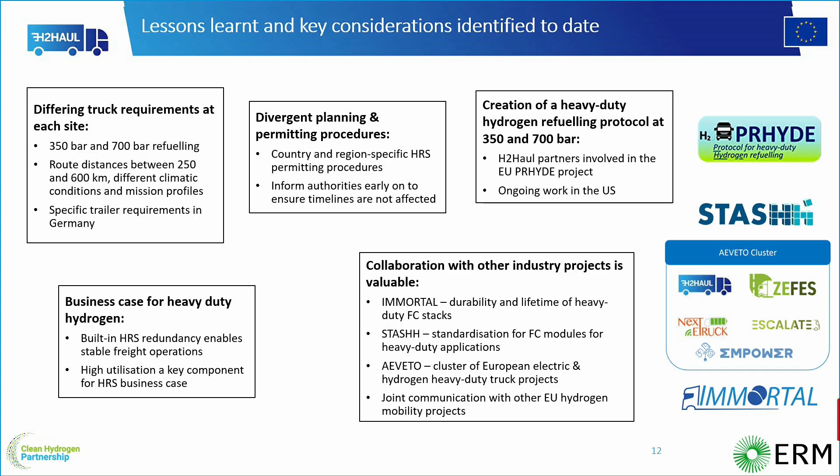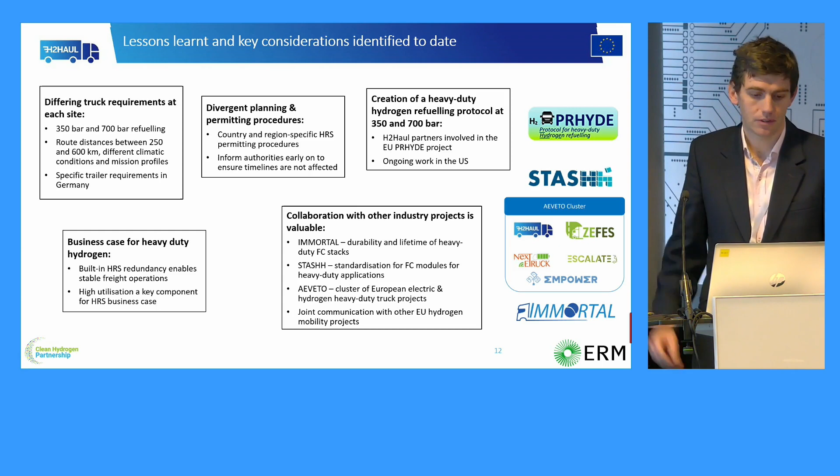Looking at the durability and lifetime of the stacks themselves, standardization of fuel cell modules to simplify integration in the trucks, but also potentially other vehicles related to trucks like coaches and even off-road machinery. And then there's potential for jointly communicating on the state of the sector and the benefits of hydrogen across the different EU projects.

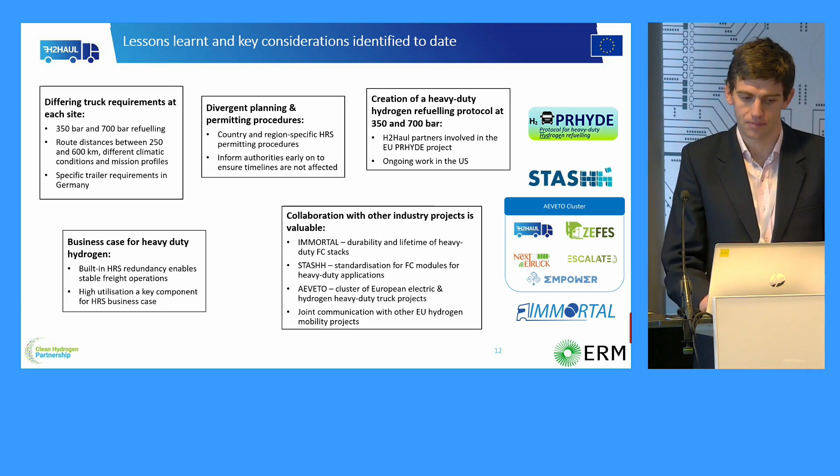I think I've covered most of this. The other thing I would mention here is expectation management. These are demonstration projects, and they're there to go through the teething troubles and learn things so that they can be addressed before the next wave of deployments.

We've seen that very successfully in the bus projects, where early on the availability of the vehicles was very low, nowhere near diesel, with plenty of breakdowns, often in fact very rarely to do with the fuel cell and the hydrogen components, and often due to the fact that they were hand assembled in very small numbers compared with more series production for diesel vehicles, which had an impact on availability.

Similarly, spare parts weren't widely available. We were flying engineers across Europe to repair things rather than using local technicians.

After several years of observing that and working very hard to rectify it, with spare parts placed close to the points of operation, increased training, looking at failure points and improving components, we're now at a stage where the buses are operating very reliably.

You never saw that problem with Vincent's Mirais. They've been operating extremely reliably from the beginning, which reflects the fact that global OEMs can build things in big numbers with extremely high quality control, and the buses are now approaching those levels of reliability.

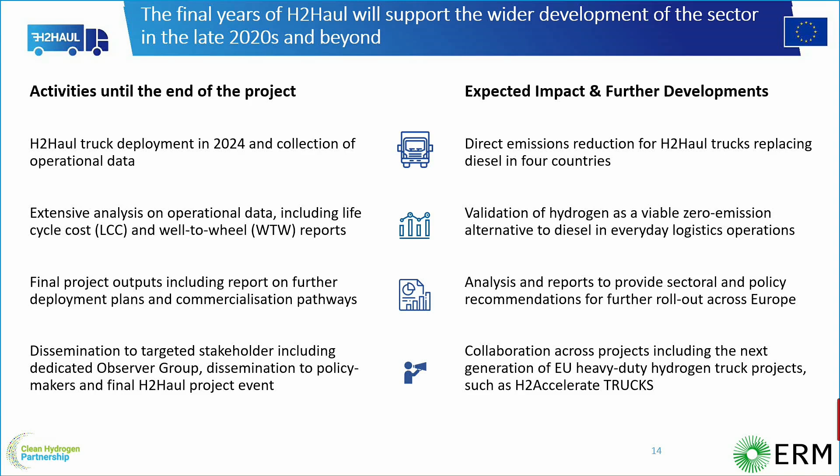Looking at well-to-wheels and the environmental performance of the vehicles, and then taking those data and looking at what the impacts are for the next wave of commercialization. Can we identify the segments of logistics where these vehicles make the most sense, the geographies where they make most sense, and how do you then plan the rollout of vehicles and connect them with the most interested customers to get a business case that works for the vehicles, the hydrogen, and for the end users.

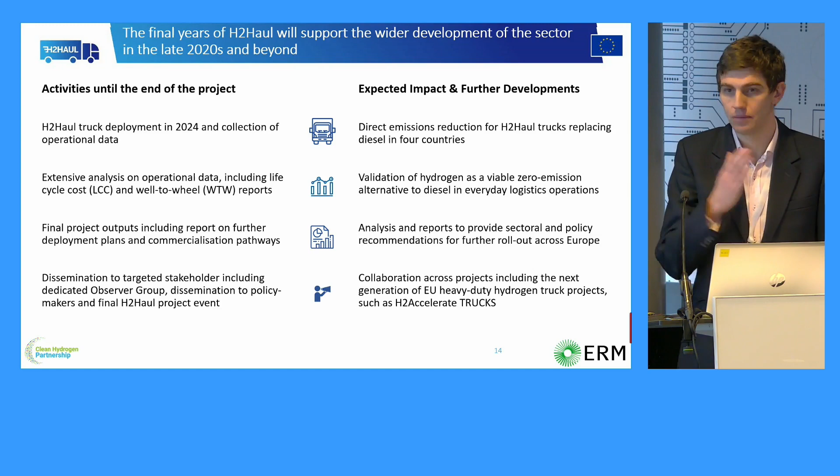Thank you very much for your attention, and thank you for the funding we've received from the Clean Hydrogen Partnership to enable the project. Thank you.